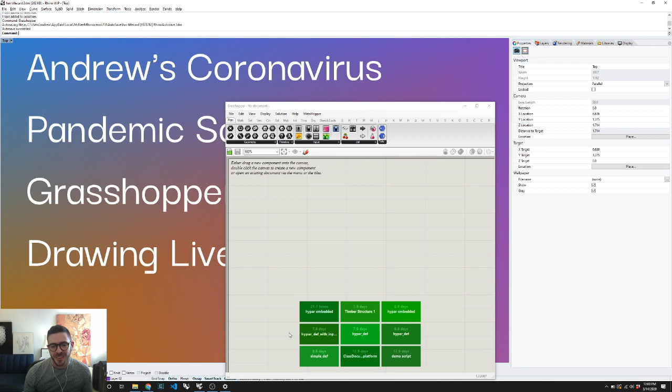Now, there's nothing quite as terrifying as the empty Grasshopper canvas. And so when it comes to starting a piece, sometimes I have an idea in mind or something that I want to play with or some concept, or more often than not, it's actually something that I saw somewhere else that I want to imitate or mimic.

So oftentimes I'll spend some time on Pinterest or on my Instagram feed and find stuff that looks cool to me and that I want to mimic or imitate.

I think that one of the things that's interesting about trying to reverse engineer something that someone else has done with Grasshopper is that inevitably, even if you manage to reproduce what you were starting with or trying to imitate perfectly, you just tweak the sliders and all of a sudden you have different work.

I think it's always an interesting exercise to extract a parametric model, something dynamic and flexible, out of someone else's work. So you're actually going to watch me noodle around Pinterest, and if we see something that excites us or that we want to mimic or imitate, we can play around with that.

It's a little bit embarrassing to show how basic my inspirational strategies are, just flipping through stuff that other people have made that looks cool and relying on the algorithm to show me. But in a way, I think there's something very real about that, and we shouldn't pretend that inspiration just comes out of nowhere.

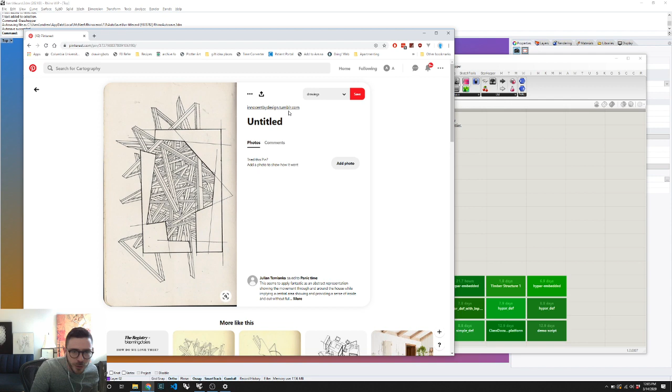He doesn't put a lot of his work online, but if you go to innocentbydesign.tumblr.com, this is his old Tumblr, which I don't think he's updated in forever, but he's super talented and you should check out his work. He's currently an interior designer at Gensler, or interior architect, and he's incredibly talented. I don't know where the archive of his work is, but always cool stuff.

So let's jump in. Let us start making some kind of random angular tubes.

And I'm going to turn off this gradient view, and I'm going to hide all this stuff. So the way that I might approach this, I usually like to start with a set of random 3D points. Populate 3D is really good for that. Here's my random set of points.

What I want to do is kind of randomly assemble these into some kind of line work that's connecting them. But I don't want to interconnect all the points. I just kind of want to set random sets together. So one way to do this would be to simply partition it into lists. So I could say partition into sets of 3 and then make polylines out of that. Let's see what we get if we do that.

So if I do that, I basically am extracting sets of 3 points at a time. This partition list will take the total list of however many points and split it into lists of 3. And then I'm going to connect each of those lists of 3 together into some kind of little polyline. I'm going to turn off preview on this guy. So that looks kind of cool. I'm getting some of that kind of angular character.

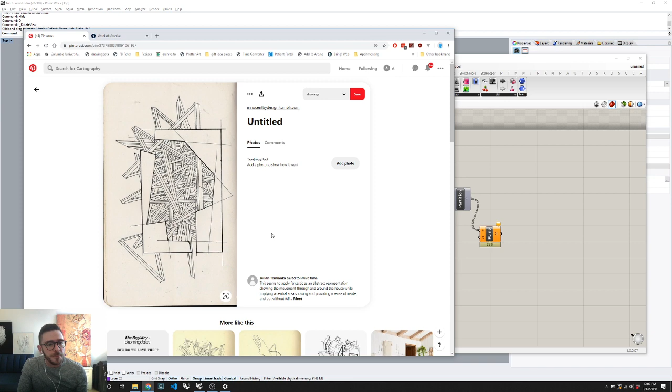And then, one of the things that the reference drawing does is that it kind of flattens these or extrudes them out into ribbons that have some 3D characteristics. So we could play with that. We could use a random vector that would extrude that along some arbitrary plane, or I can use the plane that is described by each of these.

Also, I don't like that Populate 3D uses such a flat box to start with. Let's create just an evenly sized box that I'll give some sort of arbitrary size. This shouldn't affect too much right now. So now we've got some interesting geometry.

If I wanted to get a plane through all of those points, the simplest would be just a fit plane. There are probably 100 ways to do this, but this way I get a plane from each. I can deconstruct the plane and then grab a normal, and we'll try that as the extrusion vector. I'm not totally sure how that will look, but if we took the plane normal and extruded each one of these along it, what do we get? We get something like this.

We're probably going to want that to be a little longer. I'm going to insert an amplitude, although we could multiply it as well. Let's try and plug this in. And I kind of like the idea that maybe there's some random variation in the length of this extrusion. This is looking pretty good to me because you do get a variance in the angles and the depth of stuff, but maybe it would be fun to use a random amplitude.

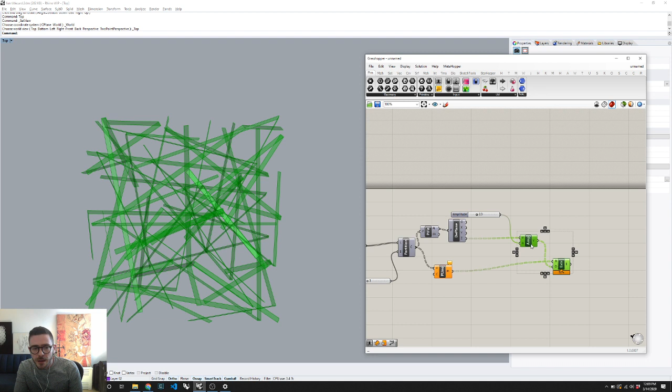I often will introduce limited degrees of randomness when I'm making work like this, and it's just kind of a fun way to go. So let's create a list of random numbers. So oftentimes when I have a data tree like this and I want to create random numbers, a trick that I often use is I'll take the list length and flatten it.

You'll often hear me say when I'm teaching Grasshopper to never flatten, like flattening is the devil, and I really believe that, but there are a few cases where it's acceptable. The reason I say that is because flattening is an inherently destructive operation in your data tree. And if we decided that we wanted to make 2 of these by supplying 2 different boxes and doing something upstream, if we flattened, now the logic is all broken. But in this case, it doesn't particularly matter.

And what I'm going to do after I flatten is unflatten. So this is a pattern I like to use. I'm going to say, okay, how many of these things are there? And I could have used any one of these lists because they all have the same list length. And I'm going to create n random numbers, and then I'm going to use unflatten in order to basically take that geometry back to its source tree.

And maybe I'll use this little fun guy so that this is a nice and clean little routine. So now I have a matching set of random values. And actually, you know what? I was wrong.

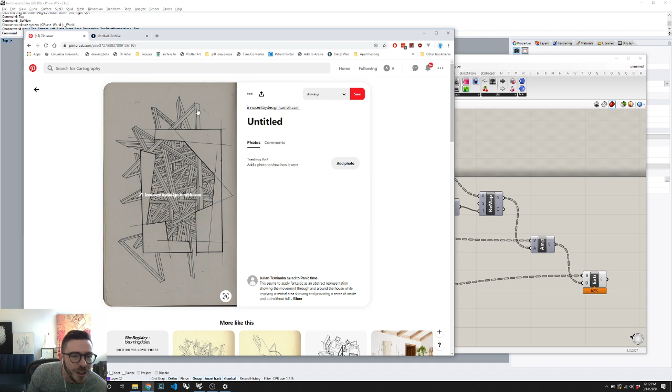And then, in order to also introduce the kind of midline, because if we look at the reference drawing I'm copying, there's this central line that he's got that is parallel to the edge and not quite centered. And in fact, in some cases, it looks like there's 2, and in some cases there's 1, and in some cases they don't even run perfectly parallel. But for now, how do we want to do this? Let's let it be, I'm having fun with this, a random number of these central lines that follow along this guy.

Also, something I often do, I have my shaded viewport set with a default background color of white, and I like to view stuff as close to the way it's going to look as a drawing right away, so that I get a sense for the aesthetic characteristic I'm getting. And in particular, I like to view things as opaque so that I get all of the benefits of occlusion and stuff. So I'm just going to do a custom preview for now. Let's just go like this.

This is a little MetaHopper trick. If you have MetaHopper installed, you can type COL equals and then the name of a color, and it'll pre-populate a swatch. So you can do col equals red and get a swatch pre-populated with red. So I'm going to use that. I'm going to leave the fact that it's shaded for now. We could also, if we wanted it to be totally flat shaded, render it as a mesh and use mesh colors, but let's just leave it as this for now.

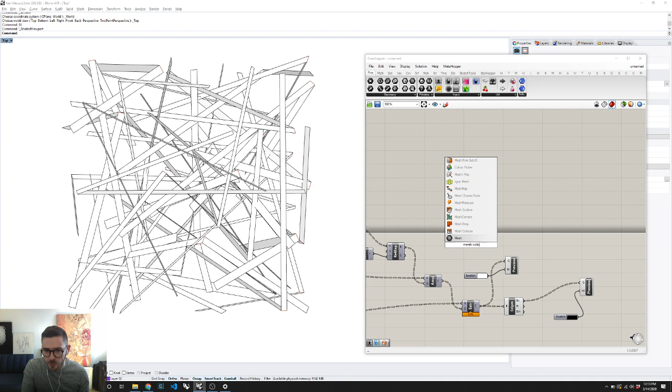And then the other thing we'll do is we'll extract the brep edges, and we're going to custom preview those. Yeah, see, this is already looking better. We'll do a custom preview with COL equals black. And yeah, that looks pretty cool. What I was saying before, if I really wanted, I could do mesh colors instead of custom preview in this particular case. Actually, let's just do that and turn that off. And then I don't even get the shading at all.

And just for those who don't know my work as much, especially over the last, really maybe almost a year and a half or 2 years, I've been mostly producing my drawings with an AxiDraw, which, hold on one second, maybe I can actually show you my setup over here. It's probably a little hard to see, but can I make this a little bigger? Hold on. I'm new to all this live streaming tech, so in any case, this is my AxiDraw. It's a little CNC machine that holds a pen, and then I basically mount some paper, and I can drive it

using, I use Inkscape, which has built-in tools for driving the AxiDraw. There's an AxiDraw plugin for Inkscape, but you can drive it any number of ways. At one point, I even tried to write a Grasshopper plugin that would drive it, but it wound up being more trouble than it was worth. So in any case, the reason I show you that is just to emphasize that the reason I like to visualize everything as close as possible to pure black line work on white is because that's actually how it's going to look at the end.

Although, you know, sometimes I'll play around with shading too and then figure out some mechanism to translate that shading into line work at some later point. So that's looking pretty good.

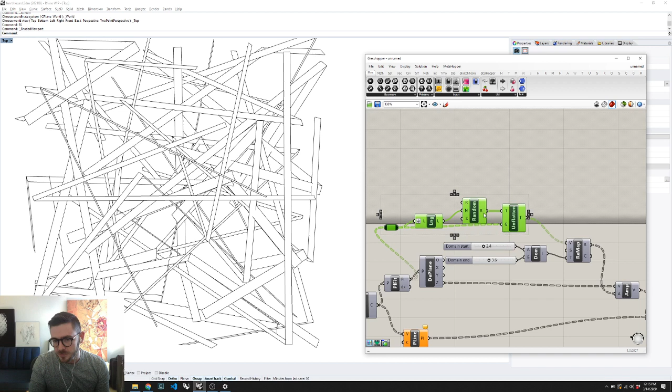So let's put this here. So I'm getting the list length, and I'm getting now a new list of random numbers. I should have exposed that seed. So I will just put a seed input there. And that way now I can get different random numbers. Because one of the things that happens if you start using random over and over again is that if you use the same random seed for all of the randoms that you generate, you get all kinds of weird things.

In fact, actually, hold on. This is a total diversion, but we're having fun. So I'm going to show you something weird about random in Grasshopper and the random generator that Grasshopper uses, which is, I believe, just system random. So imagine we wanted to create some random 3D points. Don't worry, I'll come back to the original definition.

If you grab random, and let's create 100 values, and let's give them 3 different seeds. So let's just do a series with a count of 3, and actually, I don't think we need to graft it because it'll put these as branches automatically. And then I'll just say bang to get those 3 branches, right click, match outputs, and then I'm going to construct some XYZ points.

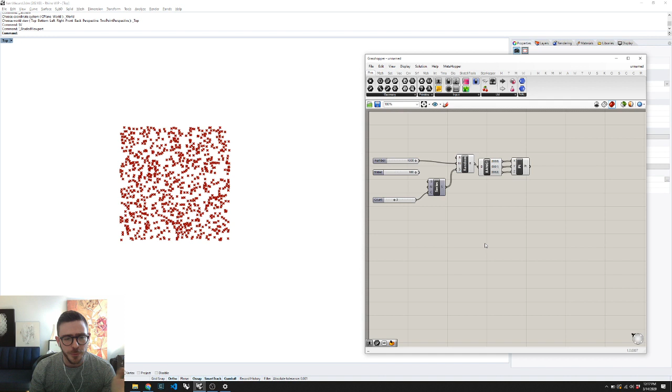So in theory, I hope I'll be able to demonstrate this because it's super weird and it's driven me crazy forever. Let's do this with closer to 1,000 points. So I've got 3 different seeds. Looks like I've got a random set of points, right? What you'll see, yes, oh perfect, it did it. If you rotate around, these are not as random as they look, even though I'm providing different seeds. And this phenomenon will occur regardless of how you structure your seeds or whatever else.

There's something about the algorithm that generates these random numbers that has some predictability, and probably someone on the video can explain a little more why this is happening. But in theory, if I'm supplying 3 different seeds and getting 3 different sets of random numbers, I would expect them to be evenly distributed, and yet somehow it creates these funny alignments between the random, which drive me absolutely insane.

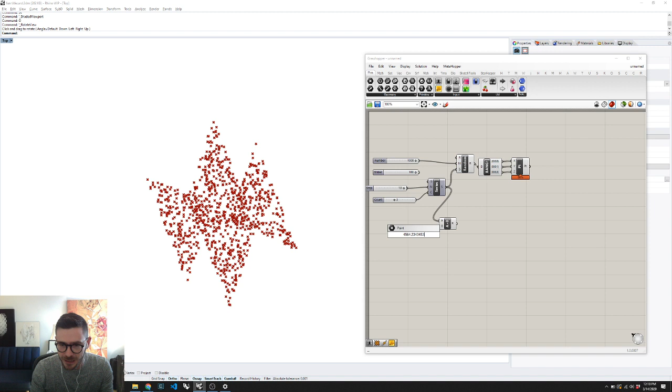If someone knows how to fix this, but honestly, as far as I know, it really doesn't matter what you do. I've tried multiplying by arbitrary decimals and stuff, and nothing that I do to the seed can prevent this from happening in some way, shape, or form. So actually, that seems to have done it, but I suspect that under other circumstances, this will demonstrate those same alignments. It's just maybe less legible in this particular fashion, because sometimes it works, and there are other kinds of these alignments that I've perceived in the past.

I do not understand why this happens. It drives me totally insane. But it's just something to keep in mind when, as we go back here, you're thinking about having multiple seeds for stuff. Oftentimes, in what's really more of a superstition than any fundamental understanding of what the fuck is going on here, pardon my French, I'll just put a super random number with some random decimals in it. Oh, that didn't work very well, did it?

Let's try 45 point. I know that it ultimately rounds it to an integer anyway, so the decimals are probably, again, totally meaningless. But I want to avoid these moments where there's some fundamental correlation between the random values in one property and the random values in another. Okay, that's our crazy aside.

So I've got a list of random numbers. I'm going to want to remap these, and remember that the value that I'm generating is the number of stripes, the number of internal lines on each one of these extrusion objects. And I think what I'm going to do is set that to be somewhere between 0 and maybe 3 at the max.

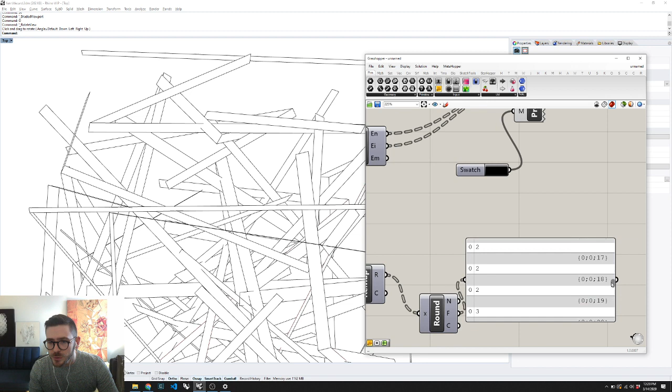So let's just construct a domain so we can play with it between 0 and 3. Actually, sometimes I'll go one larger than I want and then just use the floor once we do the random, because this is going to give me decimal values, but if I round it using the floor, we'll get a list of these values. So sometimes we're going to get 0, sometimes 2, sometimes 3. And that's going to be how many stripes to make.

So now, how are we going to generate the location of those stripes? My plan is to use the fact that these extrusions each create UV complete surfaces and then grab isocurves along them in order to get these edges that are going to be sort of parallel to the sides. So let's just set that up first, and then we'll bridge the gap.

So I'm going to explode the B-rep, and that's going to give me the individual surfaces, and then I'm going to use isocurve on those surfaces. For now, let's just use a single value. What I always do when I'm grabbing an isocurve, because I can never remember which side is going to be the U and which the V, I just supply a point that's at the same coordinate for U and for V, and I plug that in.

Let's reparameterize just so we know where we're at. And then I inevitably attach a domain to figure out, okay, it was the V curve and not the U curve. So now I can grab that, I can turn this off. Now these have the middle stripe, which looks pretty cool. But I would like to generate random middle stripes, and sometimes none at all. So let's take this, which is going to be the count of random stripes.

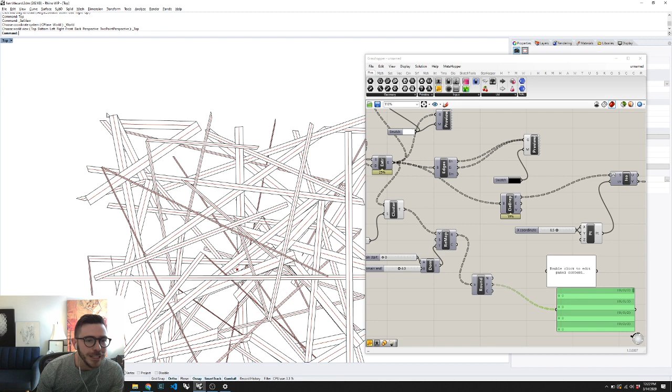Also important to note, as we look at the data tree, because I've exploded this list of B-reps, which was a grafted list with 34 branches, now I've got 34 branches, which may have 2 items. So I don't want the stripe to be in one place on one face and a different place once it wraps the corner. I want it to be continuous, so I want to supply the same sampling point for each list of surfaces. And I believe I'm in good shape because I'm generating one value per original B-rep.

The other thing I'm going to do is save this, because I always run into trouble when I get really far down in something and I've never saved it, so I don't get the benefit of autosave. So I always make sure I save in case I do something really stupid, or accidentally multiply 10,000 numbers by 10,000 other numbers in some cross product scenario, and everything just explodes.

Okay, so now these are generating our counts. What I want now is, again, some random numbers, because I'm going to want random numbers from 0 to 1, and this is going to define how many of those random numbers I get. So we are going to, again, use a random component. This is going to tell me how many random numbers to get.

And I believe if you supply a 0, I'm going to get an empty list. Yes, that's exactly what I expected and what I want. So some of these just won't have internal stripes at all. And so this is giving me the right number of these. Now, because these all have the same seed, we're in trouble.

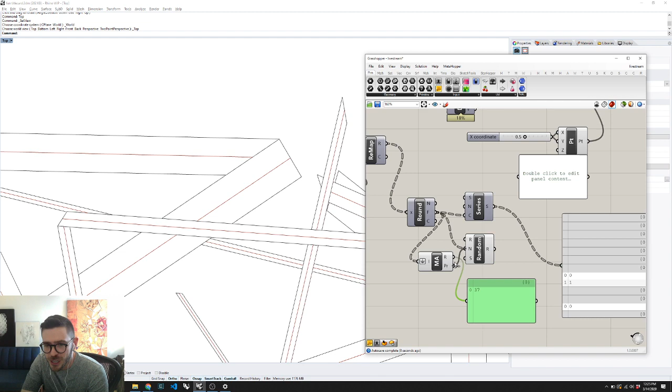If I take the mass addition, the sort of flattened mass addition or sum of all of these values, this is going to tell me how many random numbers I need in total. 37, which makes sense because there are a lot of zeros and maybe some ones and some twos. Now I'm going to generate a flat list of 37 numbers, which are all going to be different from each other. If I am correct, this series with structured values also has 37 values.

And so now I can use unflatten to basically coerce this set of random values back to the structure of the random values that I wanted in the first place. I also could have kept the random I had here. All this is doing is providing a shape for the data, but conceptually it feels weird to have a random set of numbers where I don't even care about the values. So now this should actually match our data tree.

And similarly, if we plug this in, for those who don't know, one of my favorite Grasshopper keyboard shortcuts is holding down Control-Shift in order to drag an entire bundle of wires. And now let's see what we got. It seems maybe like it's working. I think we've got a lot of ones. I'd be curious to find one where we're getting 2 or 3 because I don't actually see that. And I'm not 100% sure everything I did is working.

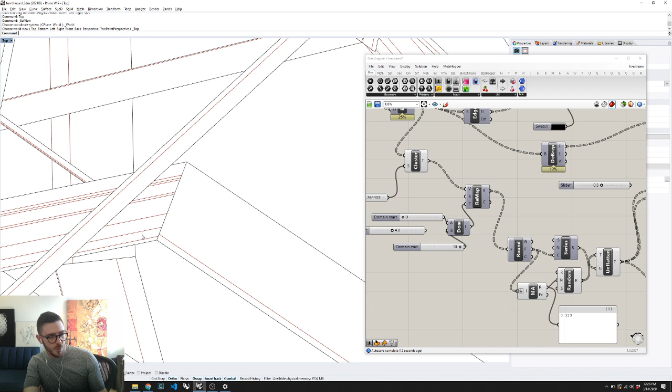So just to make sure that things are working, I'll set the max here to be more like 10. So we get a few more ribbons with a few more stripes. Now it appears to be working. I'm getting some variation in the number of internal lines that run parallel. Now I can also see that something else is wrong here, because remember how I said for my ribbons, I wanted them to wrap. So this is not quite working. And what I suspect is happening, yes, of course.

What is happening is we're running into everybody's favorite longest list matching problem, which is that I'm providing this list of points, one list per ribbon. And then I've got these, which are a list which have multiple surfaces per ribbon. So this is a very common data structure issue, and you have to move shit around. You have to basically restructure your data such that we have this entire list for each of these.

And there are a bunch of different ways to do this, but the way that I like to do it is with some MetaHopper components that I've built for doing some tree and list manipulation. So I'm going to wrap this list. And what does it mean to wrap a list? I'm going to use wrap list and levels. Wrap list is very similar to group, but it takes a list of values like these and turns that list into a singular object. So an object with no items, an object with 2 items.

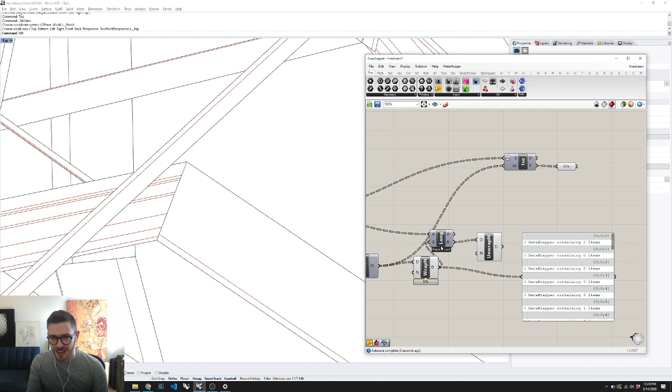So now with those unwrapped values, we've got a sort of perfect corner turning. And so every ribbon has a consistent pattern along that ribbon, which is cool. It adds to the 3-dimensionality of this, and I kind of like it.

I'm also kind of liking starting to deviate from our reference sketch and introduce more parallel lines. I think this is looking kind of cool. I also like that there's some contrast going on between the inner lines and the outer lines.

Just to keep things clean, I think what I'm going to do is custom preview line weights. Plug these in, and then let's make some fat lines for the outside. And in fact, let's only do that for the naked edges. And then, ooh, that's kind of cool too if we skip the fold line.

I'm not sure what the original was, but it's nice when you see it there. So maybe I'll bring it back in, but with a lower line weight.

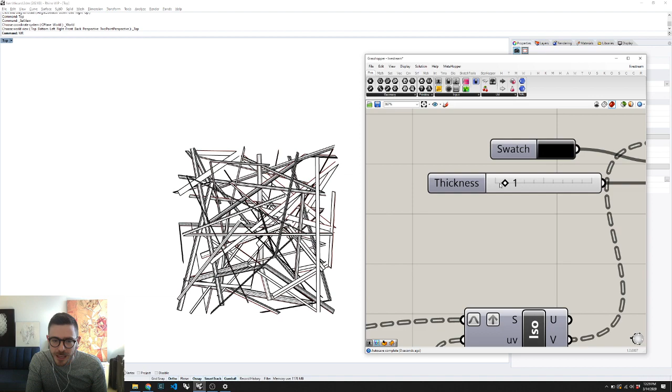This is a component from Human, preview with line weights, that allows you to set the pixel width of stuff in your Rhino viewport. So let's use thin lines for the insides, and let's also include those inner edges in this lighter line weight. That's looking pretty cool.

I've definitely got some other stuff previewing that I don't particularly want. Oh, I did want that. So that's looking pretty good. This looks cool in and of itself. It's also totally 3D, so I could decide it's much more interesting to view it from this angle or that angle or whatever.

The other thing is that we can now start to flex the box that we've got. If I make it bigger, it's probably not going to do a whole lot—yeah, that's doing something, not a whole lot. I'd expect Populate 3D is going to use very similar logic independent of the scale of the box.

But we could separate these out so that we're not necessarily working with a perfect cube. Let's play around a little bit.

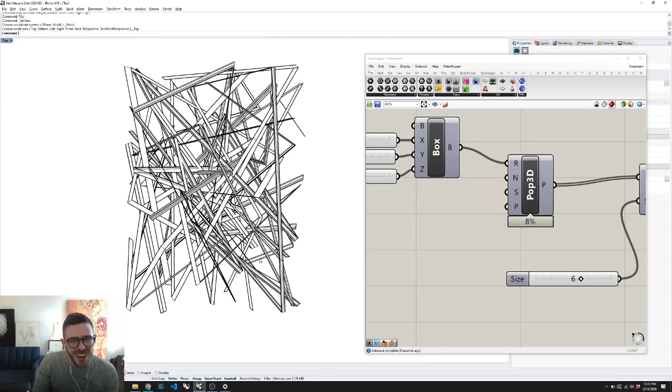Yeah, it looks cool. We could increase the number. Right now we have 100, which gets divided by 3 because we're partitioning by 3. We could also partition by something else and get more complex zigzags. Each one of these ribbons actually spans 6 points. But I kind of liked where it was at 3—2 would be really boring, but 3 looks pretty cool.

So, okay, here's some stuff. Now what do we do?

I kind of liked in the original the way there was just this random figure which seems to have been cut out of a rectangle with some voids and some construction lines. And I kind of like that it's obscuring everything beyond.

So let's see what we can do about that. It definitely won't look exactly like this, but I think we can do some similar things. So what are we going to do? In order to create that figure, I'm going to create a rectangle, and I could do this randomly.

For now, I think I'm just going to literally draw the rectangle, but later on we can maybe couple this so we can generate hundreds of random variations of this drawing if we feel like it. But for now I'm just going to make one. So let's specify one rectangle, kind of like that. I don't know.

And what we're going to do, it's also probably in the ground plane, so we'll move it up in the Z by a lot. I often render my drawings as a strict top view, and then I use 3-dimensional layering to control how they flatten on top of each other. At some point we're going to do a Make 2D with this drawing, so let's just bring it up by 50—that ought to be sufficient.

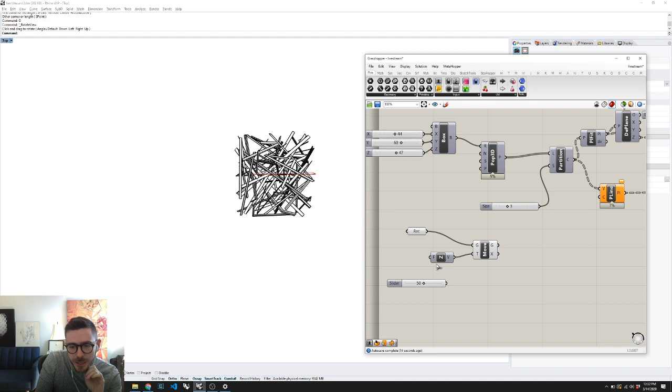That looks good. And then what I want to do is create some shape out of this rectangle that carves it away. If we look at this, there's kind of these lines, some of which extend a little beyond. So I think this strategy of starting with a limited set of random lines that lie across this surface would be a cool strategy.

So I'm going to make a surface out of this guy. I'm going to do Populate 2D this time.

Let's do partition list by 2. This is going to be way too many lines, but we're going to reduce it later. So let's do a polyline to make those into this repeating pattern, generating random lines by generating random points and then partitioning it in order to construct these.

So just so I can see what I'm doing, I'm going to turn off preview for this guy. So now I have a list of random lines that lie on that surface.

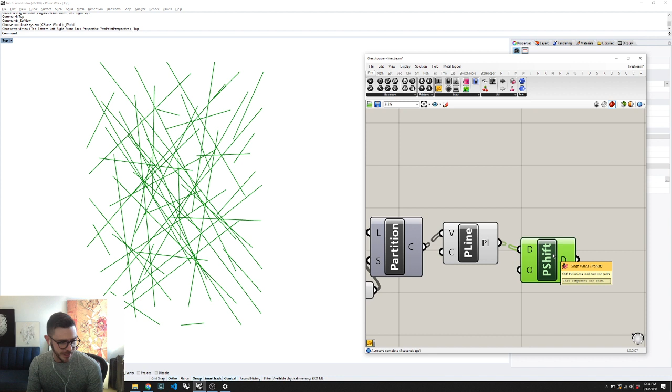And remember before I was saying never flatten anything. In this case, I do care about that, because what if I want to generate 2 of these? Whenever you think you should flatten, you should really p-shift or shift paths. This is a non-destructive way to basically pop one layer back out of your data tree.

So these are looking cool. I might also extend them a little bit. Also, the ordering of this really doesn't matter. I could have done this before or after the P shift. I'm just kind of improvising here.

Extend them a little bit, and then I'm going to do a random reduce in order to get back, let's say, well how many do we have? We've got 50. And I really only want, let's say, 10 lines. So I'm going to subtract 10, and we will reduce by — I think this is the amount that you reduce by, right? Yeah, number of items to remove.

So now we should have, if I turn off preview, 10 random lines. That might not be enough, so let's try 15. You'll see that I don't even edit sliders ever — if I need a new slider, I just type a number in the search keyword and replace the old one.

Then we've got our rectangle, which is up here somewhere. I might, just to avoid things getting too tangled, shift all this down here. Let's extend a little more — I just want there to be the possibility of this thing splitting.

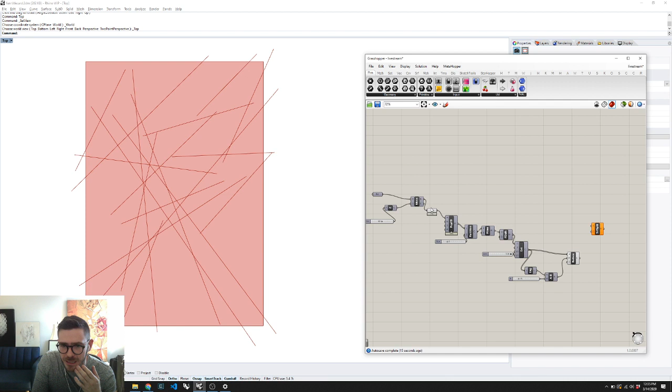Because let's see what happens if I take these lines and use surface split — this was my idea, to basically take these random lines and split them. Component that I really love. Okay, so yeah, that actually looks pretty cool, and I think this is along the lines of what I wanted.

Pardon me, that's a cough, by the way, for those of you worried about me — that's a cough I've had for a very long time, and I feel fine, I have had no fever, so please don't be concerned.

When I do a surface split operation, I often want to see the individual things and just make sure the split happened correctly. It used to be that split would fail a whole lot more and you really had to be careful about this. It's gotten a lot better, but I'm still superstitious.

So I use a component from Wombat called Identity Preview whenever I just want to make sure items are distinct from each other, because it just takes your objects and colors them with a random color, so you can see this object is distinct from that one. It also looks kind of cool in and of itself, but that's a nice debug check to make sure the split actually worked.

And then what I want to do is randomly remove some of the shards from this thing. I think, to keep the spirit of this, I want to prioritize removing the shards that are closest to the middle.

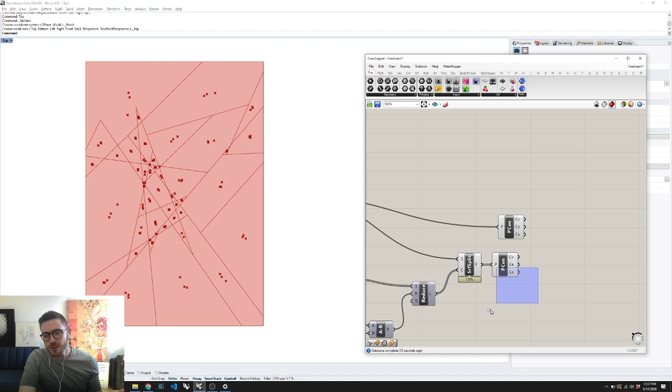So let's take this surface, let's take its center, which we could do any number of ways — let's take the center of all of these. You'll notice I'm pretty loose about data typing, just casting shit willy-nilly because Grasshopper supports it so well. So even though this is a surface, I'm going to treat it as a polyline for finding its vertex center. I could have used evaluate surf or area centroid or whatever — that would have been fine too.

So let us take the distance from the center of the rectangle to the center of all of the surfaces. And I think what I'm going to do is sort the list of these, sorting them by their distance. Then let's just look at what a sublist might look like — how many of these do I have? We're looking at 51, so let's try 20.

So these are the 20 that are closest to the middle. And actually what I want is to reverse this list so that I wind up with the ones that are outermost. Let's try that, yeah, that's kind of what I'm hoping for. That looks cool, let's go with that.

So now I'm going to take all of these, turn them off. Now I've got my shape that I'm going to want to be rendered in front of all of my line work over here.

I'm missing some stuff. Oh, I'm missing my mesh. Where'd you go? Oh no, mesh is on. Preview, oh this preview line weight. Okay, and then this will also just mesh colors in order to represent it as white. Color equals white, plug that in.

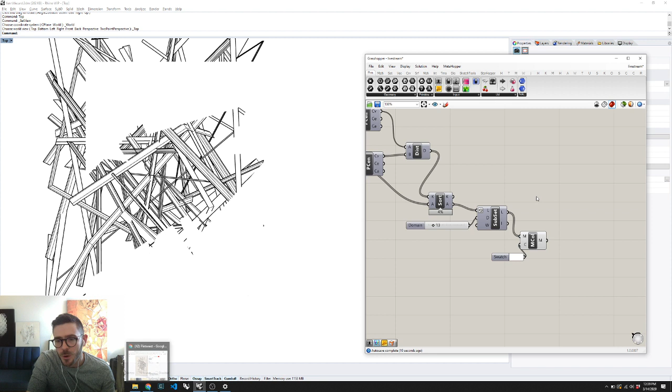And then what I want to do is bring back in those edges. And so what I could do, I think what I'm going to do is actually join this back into some B-reps, merge their faces. Maybe, maybe not. Yeah, let's do that, let's merge their faces. We'll see how it looks.

So basically I'm going to remove all of the internal edges that were there. But then, in order to get that kind of construction line look, I'm going to actually get the edges back out. So I'm going to use B-rep edges out of this, take the naked edges and boop, boop, boop. Should I, how did it look in here?

I think I'm just going to kind of extend them all. Let's see what happens. Whoops, extend curve, naked edges by 4. Let's try that.

Yes, custom preview line weights. We're going to do like 3 maybe, color equals black. If I could type, plug that in.

Yeah, so it's looking, I kind of like that they're sort of construction-liney, and then I might take the fragments. I think what's cool about this, it looks like the whole border of these shapes does have sort of a thickened appearance. So if I wanted to do that, I would take just the original naked edges.

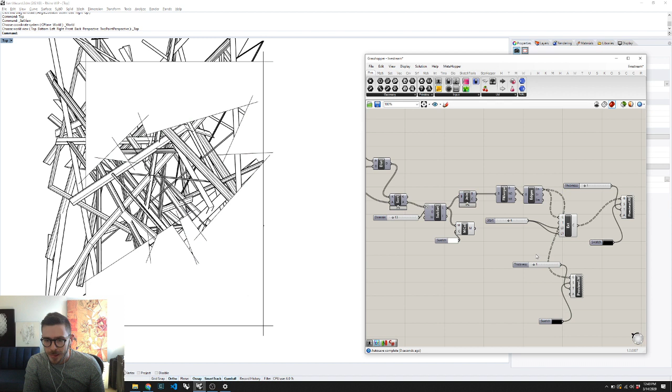Actually, I don't even need this copy. I can just take this and plug these in and make these guys a little fatter. And now we're getting somewhere.

So that looks pretty cool, I'm into that. It's still pretty derivative of what Sebastian had done, so I don't know if he would be cool with me claiming this as mine, because it's clearly a ripoff. And so oftentimes when I get to a point like this, I'm going to start trying to move away from the reference, because I don't ever want the result of something where I was deliberately imitating or mimicking to just look like a ripoff.

I am certainly guilty of producing work that looks a hell of a lot like the thing I was referring back to. But like I said before, I think what's cool about doing this with Grasshopper is that all I have to start doing is tweaking the sliders and tweaking the logic in order to get something interesting.

So what could we do here, in order to make this a little more mine and a little less his, what could we do? One thing we could do is curve the ribbons rather than have them be sharp, although I do really like how sharp they are. Let's try it, let's see how it looks. It's probably going to look like crap.

If we wanted to do that, we would just take the polylines we generated back here and fillet them. Or, well, there are a few ways to do it. Let's try it with a fillet. I love a good fillet, let me tell you. Let's try that. It's already looking bad, but let's try it. Let's see what happens, you never know.

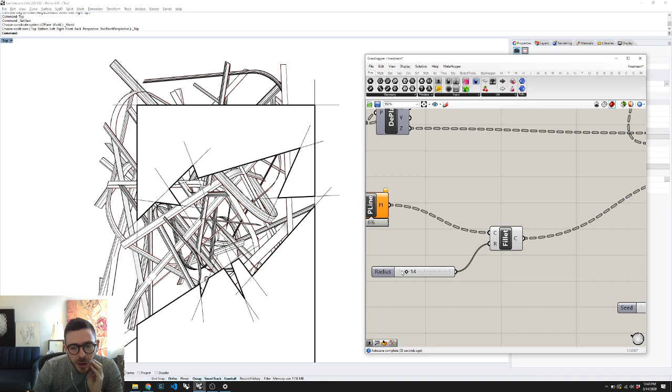We could just turn this back on, which is kind of cool, maybe. I don't know. So, we could play with that. There's something kind of cool about these ribbons. We can play with the random range and maybe let them get a little fatter. I'm probably just making this worse. Like, I really can't improve on what Sebastian had.

Let's see. What else should we do? What if I don't have this? Let's just look at where we're at. Whoops. This guy is also here. Yeah, I don't like that very much. Let's let it be angular again. What else could we do?

Let me see. One thing we could do is actually take the entire set of geometry and introduce some kind of a distortion or a transformation to it. Sometimes that's fun. So sometimes what I'll do is, if I want to keep the fact that they're angular but introduce some degree of curvature into the system, let's just try this manually first, and then we can always screw with it later.

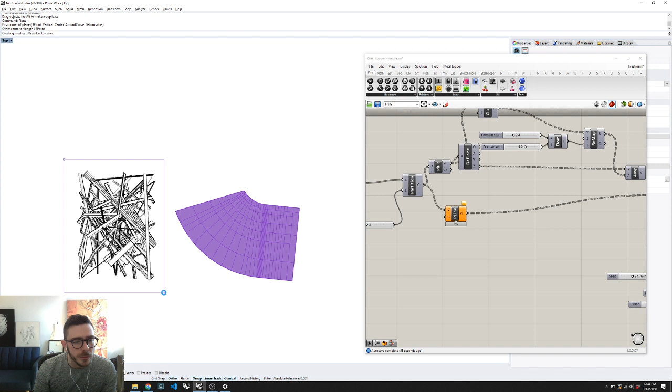I'm going to make a surface over here. And we're going to make a nice warped coordinate system. I don't know. That's ugly, but let's try it. And then we're going to do another one from here. So what if I were to take these, let's try it just on the polylines because that's nice and easy.

So if I take my reference surface over here and my target surface over here, then if I do map to surface, is it going to project everything back down? It might. Let's try it. Firstly, let's just reparameterize these both so that they have the same domain. Are they still 3D? Yeah, they are.

That's not bad. And so all I need to do now is I'll explode them, and I'll rebuild them, and then I'll rejoin them. So let's rebuild with, I don't know, 10 control points, and then let's rejoin them. Yeah, that should work. And this is another data tree point.

Whenever I am stitching something back in, I'm going to double check and make sure, okay, here's the path that I have going into this guy now. And this is now different, can I get it back to where it was? In this case, this introduced a new layer. This did not introduce a layer. This introduced a layer, so I'm going to need to p-shift by 2 to get it back to where it was.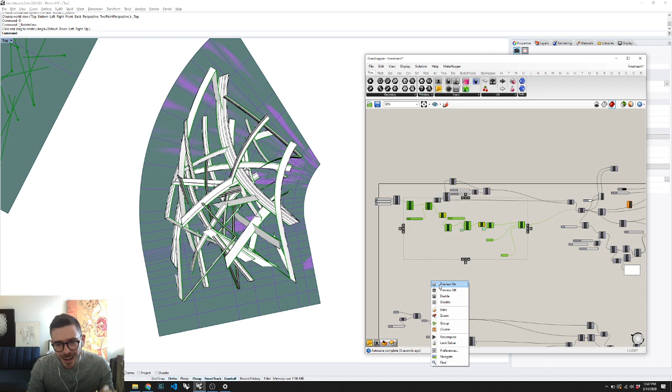So I'll plug this guy in. Let's take that. Let's plug that in. Let's see where we're at as the general drawing. That I like better than the fillet, that's for sure. There's something cool starting to happen here. I like that we're getting a little more curvature and dynamism out of this.

I kind of think maybe one way to play with this would be, rather than to just obscure it with some geometry in the front, to Boolean it out or trim out some geometry with some sort of a void, maybe. I'm not sure. Let's see. I do like where we're starting to get here, although I might tweak this guy a little bit more. There's something nice about that.

Let me just rebuild you by 5 so that I have a little more control. Ugh. Let's see. I don't know. Oh, forgot one. Yeah. I don't know that that's doing much that's interesting. Okay. Okay. Oh, I appreciate there are a lot of suggestions in here. Let's see. What should we do?

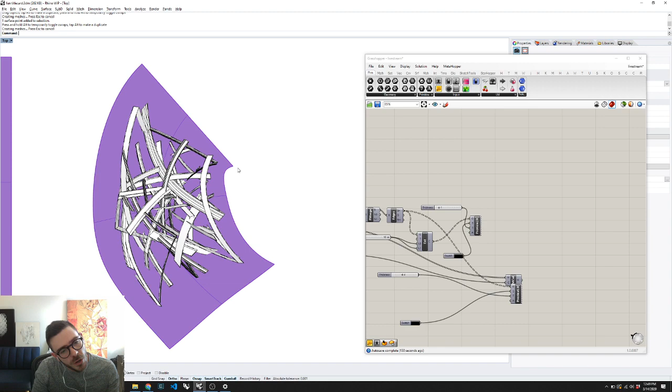I think I do want to subtract something from this. I think I want there to be a void. And so let's see what that could be. Also, this is nasty. Let's see if we can clean that up just a little. And also we're only seeing half. Yeah, some sort of a void I think would be an interesting thought.

Yeah, let's try that. So, the original rectangle that I specified over here was somewhere else. Let's try something like that. And let's see where we're at with that.

I mean, I don't know, that's kind of cool. It's still a little too Sebastian, but I feel like there's something in this. I mean, I don't know, now I kind of like it. This is the problem. I stand there looking at it and stuff. I wonder if maybe

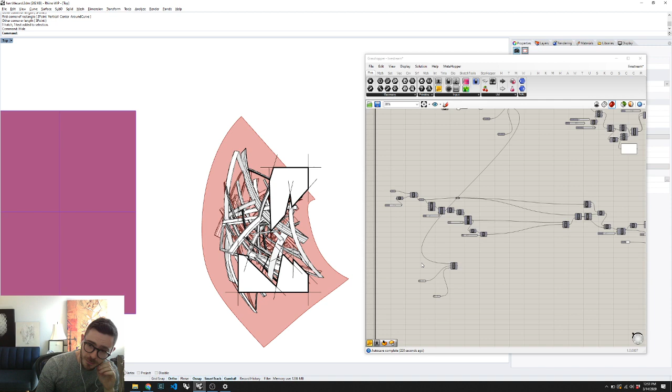I think it would be a mistake to use the same map surface, but let's just try this. I think this is going to be a mistake, because having things flow too closely along the same kind of distorted coordinate system is probably not the way to go. Oh, there's my text. Hello. But let's just try it.

So these are my surfaces. This may or may not work if I just cast them to curves and then cast them back again. We're going to want to do this in such a way that it's near the reference surface, so I'm going to have to draw it here or something. And then let's take those and try mapping those and see what we get. Also, this is another case where, because they were sort of polylines, in order to get nice results, I mean, actually we could try it as is.

Okay, we're going to do this and then this. Do a little surgery. But of course that is now going to be in the wrong place. So in fact, what we want are the undistorted ones for the purposes of the sort, but we only want to sort the distorted ones. So what do we wind up with there? Yeah, I don't like that too much.

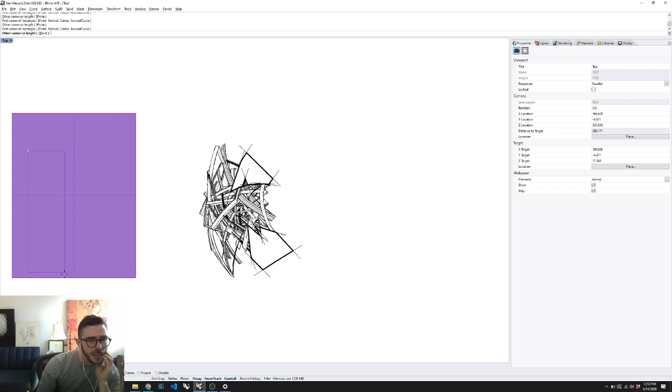Is it possible that just doing a different rectangle would be sufficient? Or maybe a pair of rectangles? To kind of take it along its flow here. Now I'm going to be really glad that I didn't flatten anywhere. So I know I can do that effortlessly, because all it's going to do is add a little more variety there. And then we're also going to want 2 different seeds probably for this. Graft. Okay, so if I have 2 different seeds, I'll get 2 different results.

See, now I feel like I might want to bring back properly circular geometry rather than this kind of arbitrary bend I did. So what if we used an arc somewhere? Let's see, how could we do this? I mean, I could just model it. Let's do that to start. Center of arc from here to here, and then we're gonna offset it through point. This is probably too extreme. Let's do it anyway.

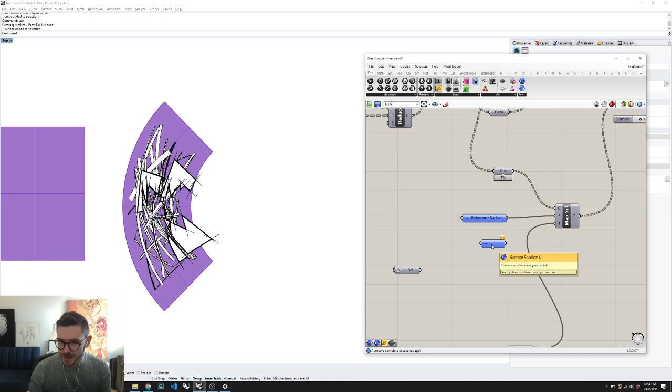Now, if I have that, I'm gonna want to refer to these. Oh, here's another little tip. If this is my reference surface, oftentimes if I have stuff jumping from one part of the definition to another, I'll use Telepathy. So I'll say send equals reference surface, and send equals target surface. And then down here, I'm going to replace these with a receiver equals reference surface. And this will automatically wire itself up to that other thing. Or I can right click and go grab it, target surface, and it will populate itself. So now I'm using the same thing in both places.

This definitely feels like too much. It's just too long in one axis, so maybe I can do a subsurface, aka an isotrim, and I'll just set domain 2D. We're gonna construct domain 2D from 4 numbers. Reparameterize, and then I'll just say 0.5. Is it in the V? Yeah, that's kind of what I wanted. So I can slide this thing along.

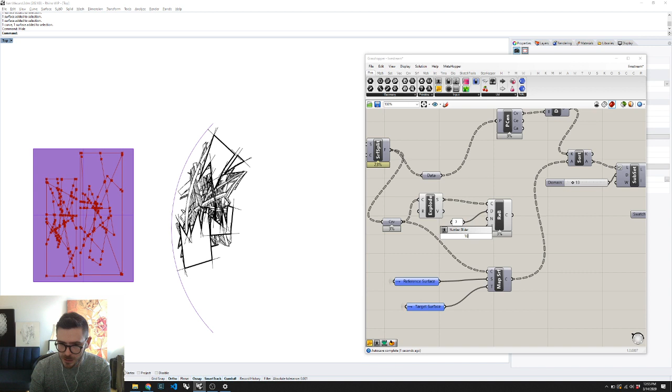And now the more that I look at this, the more I think that these really do need to curve to follow this new geometry. So let's hide this and this. In order to achieve that, it was this moment where I mapped the surface. Instead, just like I did before, I'm going to explode the curves. I'm going to rebuild them with a degree. I think it has 3 by default. No, it doesn't. We'll do 3, and we'll use 10. And then we're going to rejoin. And I'll probably have to do a path shift over 2 here to get back to the data structure I had here, which was 0, 1, 0, 0, 0.

So yeah, let's try -2. 0, 1, 0, 0, 0. Now those will curve and sort of follow the geometry. I mean, now that's looking kind of cool. I just wish there was like a little more variety here. So it might just be a matter of tweaking a few of the seeds.

Also, I need to clean up my order. We're going to need to part the Red Sea again and make it so that we don't have wires going back on themselves.

Yeah, Brian Ringley always used to yell at me for my poorly organized definitions, but especially when I'm working creatively, I gotta go at maximum speed, and I just don't have time to clean stuff up while I'm going. It's much more important to have that flow.

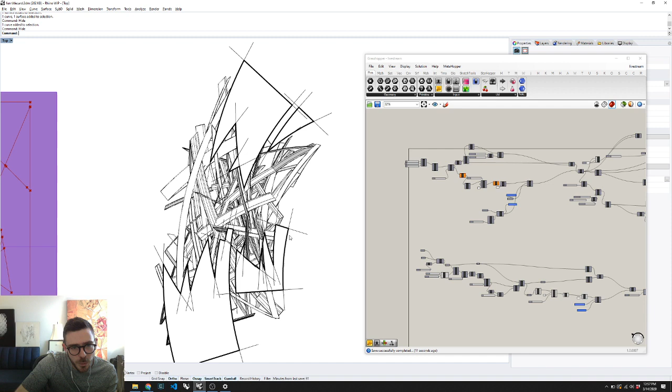Yeah, that looks all right. Let's go ahead and save this. This is looking cool. I just want, let's see. I'm not super satisfied with the figures in the front. I would like them to be a bit different. Here's where they actually are. And so we can actually see, here they are.

We could have done this whole operation. In fact, let's do that. So what I'm going to do is actually move this operation, which does the distortion, to after the subset, so I can get a preview of what it looks like pre-distortion. So I'm just going to rearrange some stuff. So that goes in there.

Now we're back. This is probably a pretty good representation. Yeah, that's what I wanted. And so now if I plug this in here instead, and let's find all of the places where this goes, and maybe I'll even unite them using the little relays, that's what they're called. Let's plug this guy in, and now, with this preview on, I can kind of visualize what's happening.

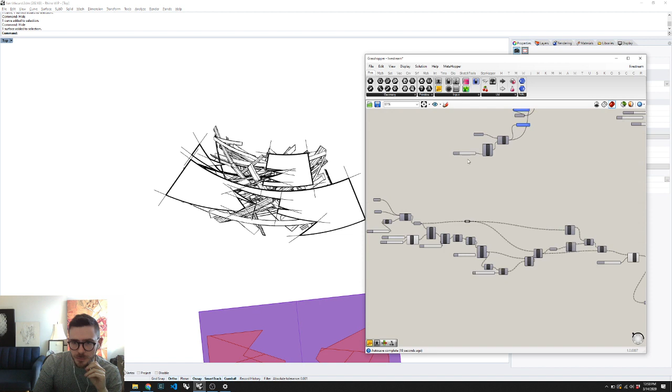And I think, is it a matter of having less removed? That's kind of interesting. This is getting somewhere, I think. I actually want to reduce the subdomain of this surface even further, because it's still a little too long. That's getting somewhere for me. I kind of like where we're at. I do kind of want it to be oriented like this. I always rotate shit arbitrarily, over and over again.

The other interesting feature that's happening here, which might be fun to play with, are the moments at which the ribbons intersect each other. So also, can I get away with less line work? What would it look like if I didn't have this? Nah, the line work's nice. By itself, it's boring. If I just have the construction lines, yeah, well, we'll see. Okay, so let's leave it all in. I'm feeling good about it.

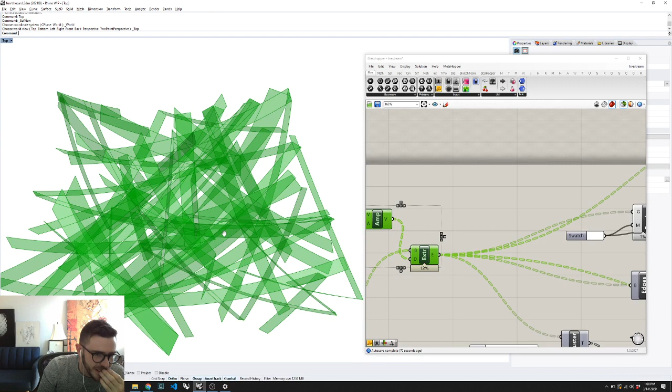However, I do think it might be fun to play with the moments of intersection, stuff like this. So if I have all of my surfaces over here, I want to intersect them all with each other. Yeah, this could be cool. So what are we going to do? We've got 33 surfaces. I'm gonna give myself a little gap, although I don't know that I'm necessarily going to replace these. But we'll see. I think what I want to do is take these, and oh no, they're B-reps, aren't they?

What I want to do is intersect each one with each other one. So I am going to p-shift this. So now I have a flat list, and I'm going to use cross-reference in strict upper triangle mode, I believe. If you're not familiar with this, it's useful to understand. Let's do a character sequence just to visualize it. So we'll do character sequence and we'll use cross-reference.

So what does cross-reference do, first of all? Cross-reference is a way of kind of multiplying one list by another. So let's just do this with 5 values. It'll be easier to see. So this sequence is just A, B, C, D, E.

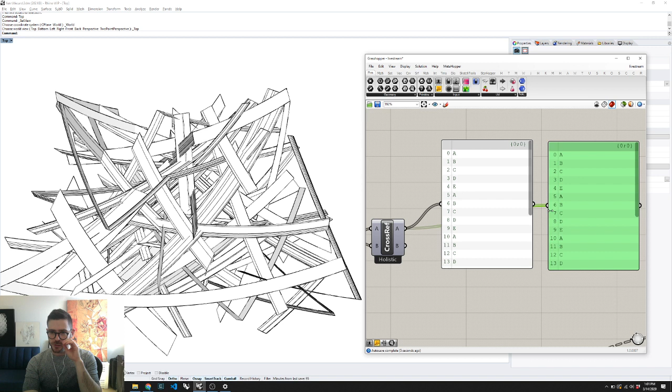Cross-reference will generate A, B, C, D, E, A, B, C, D, E, A, B, C, D, E in the A, and then it'll generate A, A, A, A, A, B, B, B, B, B, C, C, C, C, C, so that you basically get every possible combination of the two. So if I were to join these two together, I would get every possible 2-letter sequence you could make out of A's and B's. Now, if I switch to strict upper, well, here, let's cycle through the options.

Diagonal will just be, actually, I don't even know what that does, honestly, because I never use it. It describes it: do not create those combinations where all items have the same index. I see. So this is everything minus the diagonal. So you won't get an AA or a BB, but you will get a BA, and you will get an AB.

Upper triangle says, and if you visualize this as a matrix, where basically your list is along the x-axis and along the y-axis, if you imagine every possible combination along that grid, and visualize just the upper triangle, you'll see what you get, which is every pairing of the two, regardless of their order. Because when I do holistic, I'm gonna get an AC, and I'm also gonna get a CA.

If we do upper triangle, then we'll get every possible combination where order doesn't matter. So if I have a DE, I will not have an ED. And upper strict removes the ones where they have the same index. So AA is not going to be here, or BB. But this tells me that for these 5 options, there are basically 10 ways to combine them as a pair, irrespective of the order. So why do I care about that?

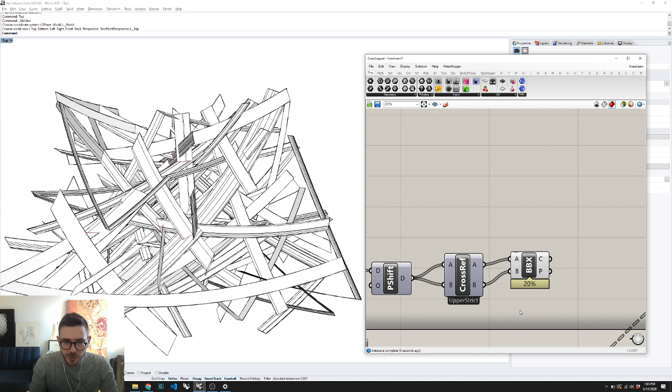When I'm doing an operation like this, where I basically want to have every B-rep intersected with every other B-rep, I may end up doing this and then wind up, for data reasons, going back to something a little bit more brute force, but I just want to demonstrate it. If I now say intersect every B-rep with every other B-rep, there are 33 of them, and this only has to execute 528 times, but it's going to find every intersection moment between any two ribbons. So this is pretty useful.

Now what I might want to do, I'm still not totally clear what my hope is with this, is I might want to introduce a reveal, like maybe one of them pulls away where it intersects another one. I feel like that could be cool. Let's see what happens. It might wind up being a little difficult, but let's try that, and then I might call this one done depending on where we land.

So now I've got a bunch of these surfaces. What am I doing with them? I'm getting their edges, I'm converting them to mesh, I'm deconstructing them as individual surfaces, which should be fine, and then I'm getting isocurves. The reason I'm doing this check is I just want to make sure that if I were to introduce a trim to these currently untrimmed surfaces, I wouldn't break anything.

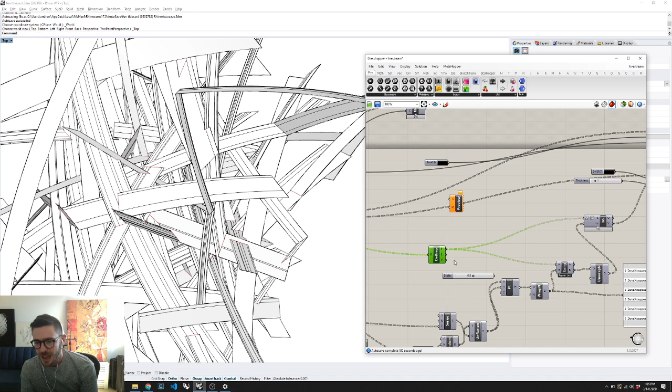And in fact, I think I'm safe, because if you have a surface that has some hole in it, we'll just do like this, I believe if you take that surface and do isocurves from it at some coordinate, it is gonna respect the holes. I don't think it always did, but I just did a tutorial the other day where I found out that it did. So is that true? Let's just see. Oh yeah, it's actually trimming it against the trims, which is great. So I believe we are safe if we introduce a trim.

So how are we going to introduce a trim? It's always hard to Boolean an object in 3D that's not a closed volume. So let's see what we can do. One thing we could do is, I kind of like this idea. Let's try this. This is probably not the best way to go, but I'm going to do it anyway. So let's take these surfaces and in fact, let's...

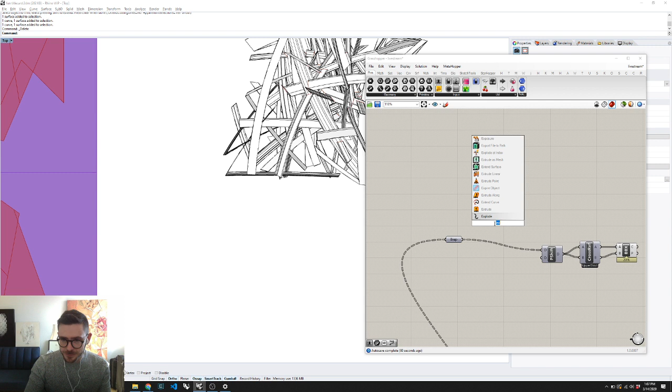I think I have to get rid of this because I think I need to know which surface each edge belongs to, but that's okay. So I'm going to explode the B-reps with deconstruct B-rep. Now I've got all my whole surfaces. I'm going to get their dimensions. This is going to look crazy for a moment.

I'm going to get their dimensions, and I'm going to construct some plane surfaces, actually, which have the same dimensions as these. Why on earth would we want to do that? Because what I'm going to do is I'm going to take these surfaces now, and unfortunately I think I can't use my super efficient logic here.

I think what I have to do is I am going to actually intersect, well, actually, no, let's use these because we've already gone to the work of calculating where these intersection lines are, and basically I just want to attach these intersections back to the surfaces that they came from in a data structure. There are lots of ways to do this, but I think the easiest way, the sort of cheating way, is going to be just to use a distance test.

So I'm going to find the middle of each of these intersection curves. I'm going to do a surface closest point on my surfaces, and I'm going to find these. I think they can be flattened, or at least I'm going to adhere to my own rules and p-shift them just for the hell of it. So now I've got a flat list of all the points which are in all of these intersection edges.

I'm going to test each one, or actually we probably need to graft this. If the distance from each of these surfaces to each of these lines is smaller than 0.01, some small threshold, you never want to check equal to 0. You always want to check smaller than some value, because floating point math will often introduce very small numerical errors. It's always a good idea to have a tolerance.

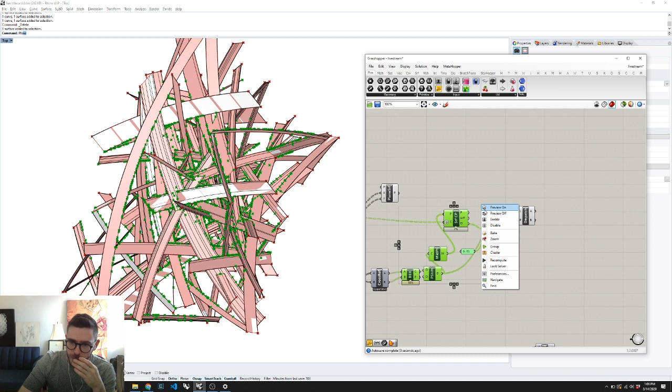So if that value is smaller than this one, we're going to dispatch out the edges. So I've got 65 edges, which I'm checking against all of my surfaces. There's probably a smarter data structure way to do this, but when in doubt, use a distance logic. So just to check, I now have one list for each of my grafted surfaces, each of which has 65 values, which are the 65 intersections that we found.

So now I'm going to wind up with edges that are organized by the surfaces they belong to. This is not dissimilar from a technique like taking a waffle grid and then unfolding it out flat. You'll see what I mean in a second. So I've got all these curves, they lie on all of these surfaces, and I've generated new unrolled versions of these surfaces, which just for shits and giggles we can view on a grid using arrange in grid from Wombat. This is just to visualize, so I'm going to flatten it. But you can see basically I've created this set of surfaces, which are sort of like unrolled versions of each of the ribbons.

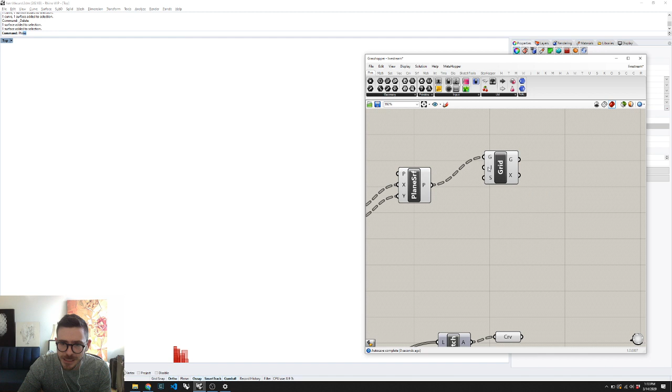And what I'm going to do is take, and actually, you know what? If I let this, it's gonna do that. So let's just unflatten post. Just for clarity's sake, I don't think spreading this out is actually necessary, but let's just double check, because there used to be a bug, which is probably my own fault, that arranging stuff in grid would actually shift its order. Is the order the same? No, the order is the same.

Okay, cool. So now I've got my unrolled surfaces and I've got my surfaces in space, and I'm going to do another remap curve, or map curve to surface. Whoops, not that guy. Map to surface, where these are my source surfaces, these are my curves. This is a really silly way to do this, by the way. So if I've done my job right, it's going to put, and let's also, always a good idea to reparameterize whenever you're doing anything involving a surface domain. Maybe not necessary in this particular case, but it doesn't seem to have changed anything.

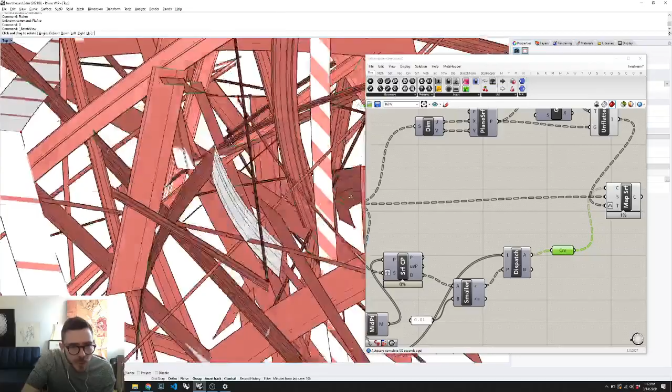Now why are they all showing up on the edges? I wouldn't expect that they would. Are there a lot that are falling directly along the edges? It doesn't look like it. So something I'm doing is wrong here. What I want to see is a bunch of diagonal slashes showing up along these guys. And I see some, but there are also a ton that are right at the edges, and that doesn't seem right to me.

Wonder why that is. Let's be a paranoid reparameterizer and check data structures. Yes, these need to be grafted, both of them. Just to avoid any issues, I'm going to lock the solver before doing my double graft. There we go, that's what I wanted.

I have coffee as well. Mine has whiskey in it. I highly recommend that on a day like today.

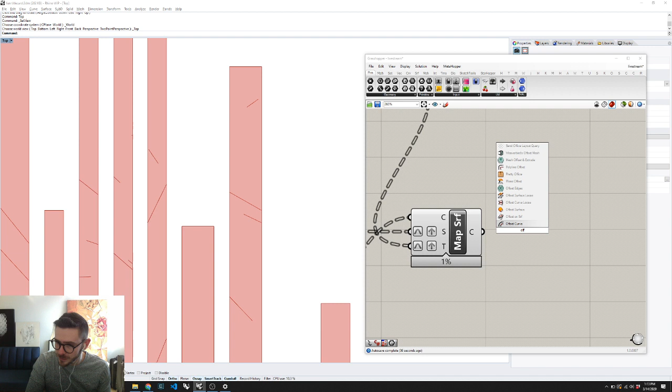So what have we done? We took all of these intersections out in space, and we unrolled all of the ribbons and mapped them back down to the ground. Then I'm going to do an offset polyline using Clipper to create some nice thickened versions of these. Might be too much... no, that looks good, that's a nice size for my little reveals where these intersections happen. And then, if all goes according to plan, I should be able to...

Let us do this. We're gonna do a... how are we gonna do this? There are lots of ways, let's do a region difference for now, which is going to take my unrolled surfaces and my little slits that I want to cut out of them.

Let's just check data structures. This is probably going to have to be grafted. That should work. It's going to cut those holes out. Ah yeah, that looks nice. We like this, this is exactly what we were going for.

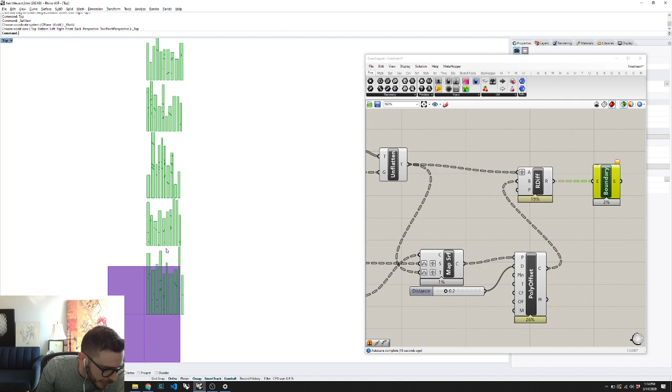So now, the next trick... you know the other thing we could do? Nah, I think this is the way to go. I think what we want to do, if we're lucky, we could maybe copy the trims.

Let's test that over here. This is a weird component, copy trim, which allows you to take the trim curves from one surface and map them to another. So if this is the target surface, again I'm going to graft. And then let's just check, now we're in funky data tree scenarios - 67 branches, and then let's graft and check. 67 branches, yeah okay cool, I buy it.

We could still be in dangerous territory here. Yeah, so almost, but that's promising actually. It's not quite right, but ultimately what I want to do is basically copy these trims. I think in any scenario where there were multiple surfaces generated, that's what happened - any scenario where there are multiples, where we got a full through cut, we're getting this funky situation, which makes sense. This is not going to work exactly.

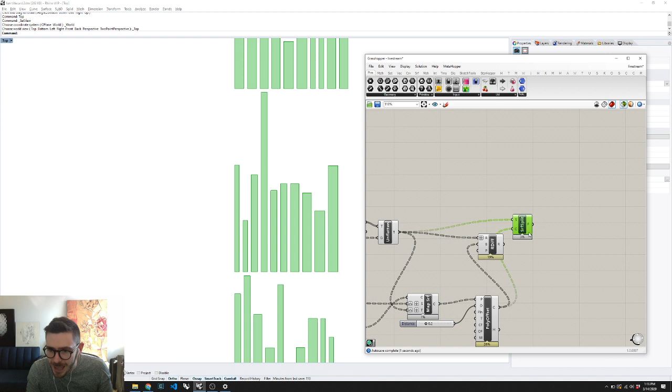So instead, this is what we're going to do. Similar technique, but instead of relying on boundary surface, we're going to use split surface again, where we're going to take all of our unrolled surfaces and all of our little cuts. Oh, this probably needs to be grafted - whoops, grafted, not flattened. And now we're going to take - did we get everything?

Yeah, that looks pretty good. Everything whose area is smaller than, or larger than, some threshold, which I don't really know what that'll be, but we probably got some things with big areas and some things with small areas. So let's say if it's larger than 10, we keep it. Okay, so why did I do that? What I wanted was to get a representation of the... actually maybe my threshold's too big. Let's see if we can... yeah, there we go.

That's probably good. I wanted to get a representation of these surfaces minus their reveals, in the exact same UV domain as my unrolled surfaces, because now I can use my copy trim trick - at least in theory, we'll try it. I'm going to take this as my source, and then I'm going to graft my original surfaces way back here.

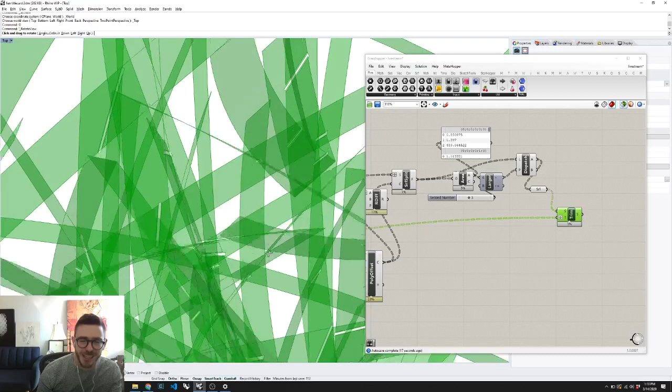If I've done my job right, and this is a great big if, I now zoom in - there we go. Anywhere there's an intersection, I get a cute little reveal. Look how cool that is. This is a tactic you can use to make waffle models and stuff - check all the intersections, flatten everything out, do all of your geometric operations in 2D, and then map it back up to 3D.

I have an extra hard case because I'm dealing with curved surfaces too. But I'm really into those little reveals - I think those look pretty cool.

And now, look how far off we got. So let's just turn all this off. Okay, because I don't like this, this looks fake to me. But if we use this, now it looks cool. I mean aesthetically I don't even know if I like it that much, but I think it's a cool trick.

Can you guys hear the fire alarm? I think my boyfriend's cooking. Oh well, hopefully you can't hear it, and hopefully my apartment is not burning down.

All right, well, there we go. You know, the other thing that's kind of cool, I actually sort of like these close-ups of this whole scenario in 3D.

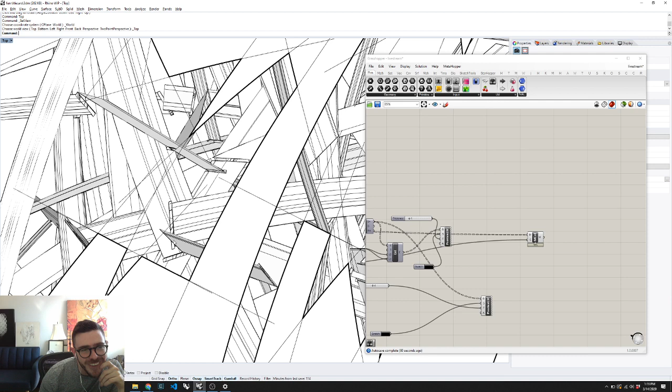I don't know, at some point you just gotta call it. I might just take everything we've got here and do a... yeah, those little slits, man, that was a hell of a lot of work for not a lot of aesthetic value, huh? Oh well, that's alright. It's a cool trick.

Okay, so I'm thinking I might call it here. But I'd like to do a couple things in order to get this ready for production on my plotter.

Oh, you know what else we'll do before that? I'm gonna save this and try to introduce a little bit more randomness. And let's just flex this, because it's always fun to - actually it's better, you know what, the smaller I make it, the better it is. I think it has some of the character of the original. And you know what, it pains me because it took so long, but I'm just gonna totally bypass my little slits - I just don't think they add that much. Oh well, hopefully you learned something from that.

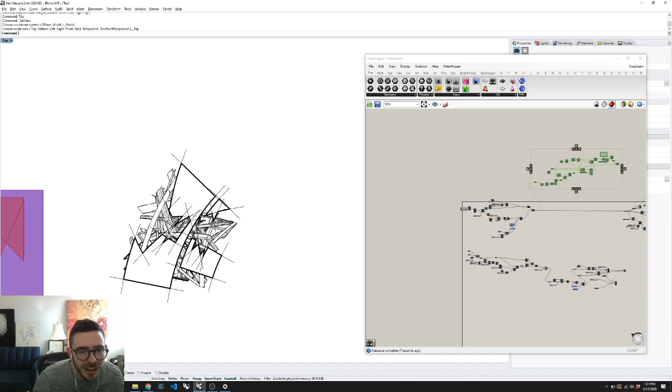Let's take all of our geometry, and yes, okay, I know what we're gonna do. What I like to do before a make 2D is group all of the kinds of stuff into branches, because when I make 2D in Grasshopper, I should in theory be able to match the results back to the source geometry I was dealing with. Pardon me, and that can be quite useful. So let's take one thing at a time.

Let us take these edges - these are the naked edges. These are the sort of lighter line weight edges going in here, and then we've got a mesh. In this case I usually find make 2D works better with surfaces than meshes. It really depends, but it's probably a good thing.

And then I'm gonna take the raw surfaces from here. I don't have a super logical order here, and I've got these, which are my construction lines, and then I've got - did I already get these? No, let's get the thick edges. Cool, okay, now I just have 5 very neat branches.

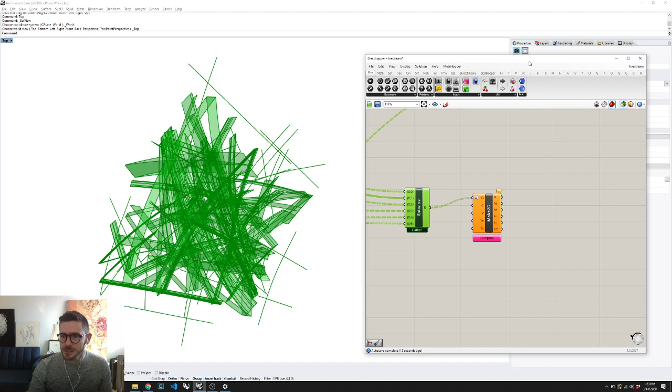I'm going to make 2D, and I'm gonna use the top view. I'm gonna flatten this, which again violates my no-flattening rule, but I will unflatten it after the fact. So we're gonna need to construct a view, and I think for now I'm just gonna use a named view. I can also construct one geometrically, but this is often the easiest way to go. We'll type named view and save as 'top for make 2D'.

Oof, I'm running out of steam, so this will probably be the last thing we do. We'll say view from Rhino view, and the name is 'top for make 2D'. Hopefully it found it - yes it did, that's the view. No clipping planes, no tangent edges, no tangent seams. Let's see what we get.

I'm amazed that 30 people have stuck with me through this, by the way. That's kind of amazing.

So we got a bunch of stuff. Now hopefully the visible lines look a little bit more like our drawing. Oh, did I forget geometry or something? Because it looks like we're not obscuring anything. Oh, I did - I forgot these. So didn't I think I... oh, you know why? Because they're curves, is that why? Yeah, they're curves - I need to cast them back to surfaces before I can pass them along. That is why. Let's do that, and let's rerun our magical make 2D.

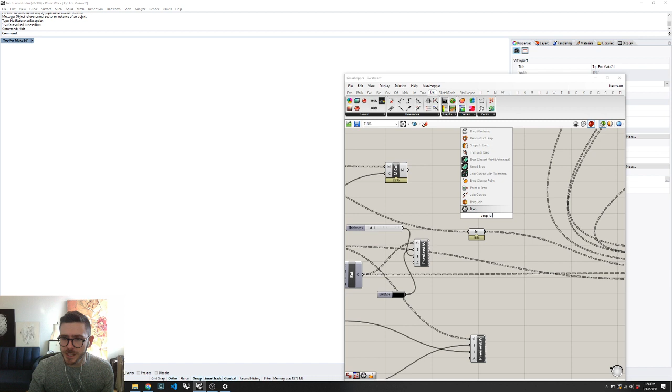And actually, let's do a merge - let's do a brep join and a merge faces so we don't get those internal edges. Yeah, that's more like it. Plug that in. Rerun.

That's more like it, that looks cool. I think what I'd like to do now is figure out which branch this came from before. Here's another trick.

I'm going to use wrap again, this time to make a list of items, and then say random color. This is a wombat component I think I already showed, and I'll graph that so I have one color per branch, then I can color code my results with a custom preview, all my geometry color coded by branch. We'll zoom in. The other trick is if you cluster a custom preview component and turn on preview contents, even in this mode where you only draw preview geometry for selected objects, it'll still show with appropriate colors. I love that trick.

Okay, so I know I want certain branches to be a little bit thicker than others. This is actually going to be a post-process on the 2D geometry, because now we're all projected back, we're flat. So this is going to tell me the index of the source object.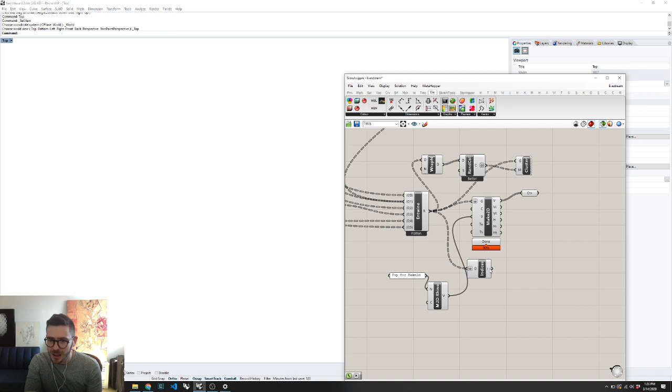And so I flattened here. If I use the indices component, list indices from Wombat, which is really just like a list length plus a series, and then I want to figure out which branch each one belongs to. So how am I going to do that? I have 1238, 1238, 547, right, which makes sense.

One thing I could do - there are probably some objects that don't show up at all. So how am I going to figure out which index belongs to which group?

I think what I'll do is unflatten my indices. So now at least I have these indices per branch. And then I should be able to, for each of these, say member index. Let's try that. So basically these are going to be the indices of the source object. This is a list of 547 things, and this is sort of a parallel list of indices.

I'm going to find out whether this index for each of these 1238 objects exists in any of these branches. So the set to operate on and the member to search for - this is going to be the set. I actually have 6 sets and 1 list of members. I suspect in most cases the index is going to be -1. Oh actually, it doesn't even do that - it just gives me back no index.

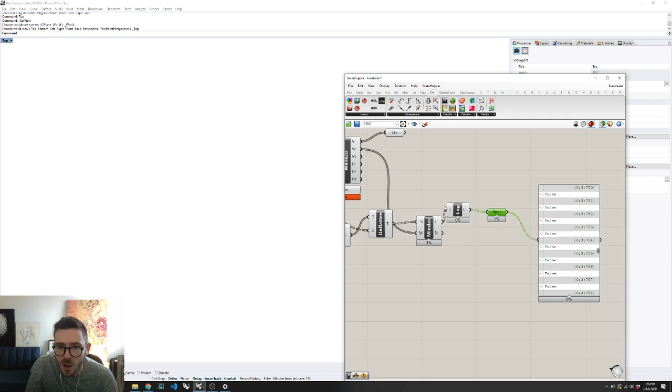So what all that messy data tree stuff allows me to do is dispatch my flat list of make2D curves back into branches that correspond to their source geometry. Woof, that's a big mess, but the beauty of it is now I can just double check that I got it right. And lo and behold, that make2D sure looks like it got the source objects correct relative to where we came from.

Let me go over that again, because matching your source objects to a particular branch after a make2D is definitely a useful trick, and this general pattern comes in handy a lot.

So I've got some flat list of stuff - in this case 1238 - and that flat list was generated from another flat list, which has 547 items, which came from a non-flat list, which had 6 branches.

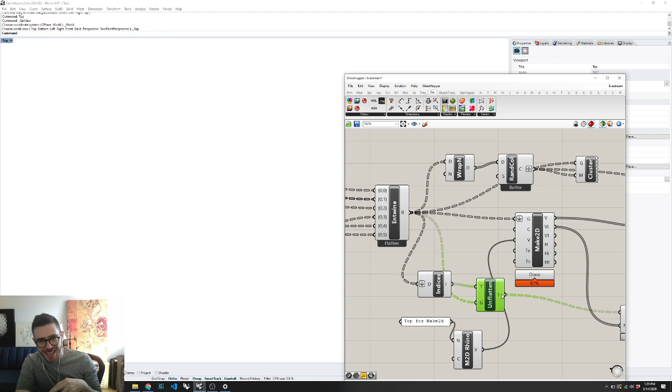I'm going to get the flat list of indices from 0 to 546. I'm going to unflatten those to coerce those indices back into the branch structure they came from. So this is going to be pretty straightforward - it'll be 0 to whatever.

You know what I could have done too? I could have probably created a domain from each of these and done a domain includes. That would have been - let's do that too, just for shits and giggles. I just thought of a better way to do this.

If we take the bounds of this list, we'll get an index domain for each branch, and then we can do domain includes, where I've got my 6 domains for my 6 branches. I've got my indices, and this should be equivalent to what I got here, which is it'll be true if it's included and false if it's not.

So in theory, let's actually just visualize this. Zoom. If I make this my dispatch list, that's way better. And this will be faster too, because now I don't have to search for every item in every index. Instead, I've just created a range, because I know that these are gonna flatten out to a nice list of indices.

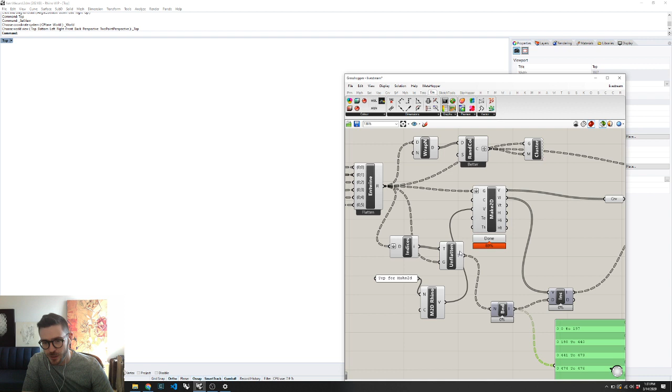And I know that it's going to go 0, 1, 2, 3, blah, blah, blah, up until the end of that branch, 197. And then it's going to start over for the next branch, but it's just going to go sequentially. So I can safely say that if I just find the bounds of each one of those branches, indices 0 to 197 belong to branch 0. Indices 198 to 440 belong to branch 1, et cetera.

And so by doing that, I can now take this list of indices that came back out, which are a map from my 1238 produced objects and the 547 objects from which they came, in order to split this back out into a group according to the branch that it came from. So, that's a heck of a lot of work. What are we going to do with it?

What we're going to do is we are going to bang, which is explode tree, so that we get these back out. And I'm going to take the curves that I want to be thicker, because I'm lazy when I produce my drawings. I don't like to switch pens. Instead, I like to double up lines that I want to be thicker. So I want to take this whole set of curves, and I want these to be just a little thicker than the rest to have a little bit of line weight variation.

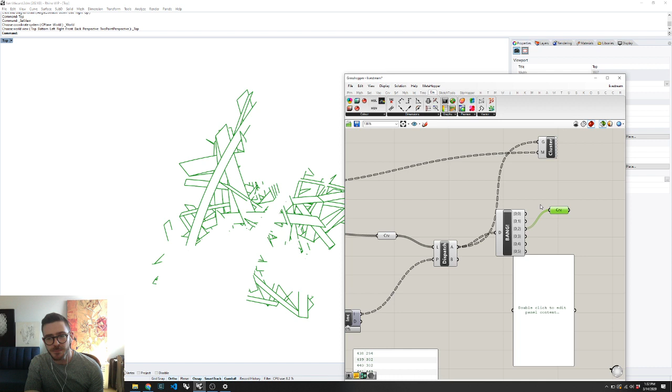And I might end up doing that with some of these others. These definitely want to be thin. These might want to be thick. These might want to be a little bit thick. And then I think the ones I just had want to be the thickest, and then everything else can be thin. So let's organize this. These are going to be thin, thin, thin, and thin. These are going to be medium. And these are going to be thick.

So the way that I do this with a single pen, which happens to be 0.25 millimeters, is I just offset and double up the line and have it draw twice so that we wind up with a kind of double line. So these are fine. These I'm going to offset by some amount. And I don't really know what unit system I'm in now. So this would maybe be a good time to actually locate this on a page and know physically how big it's going to be so that I can make decisions about its line weight.

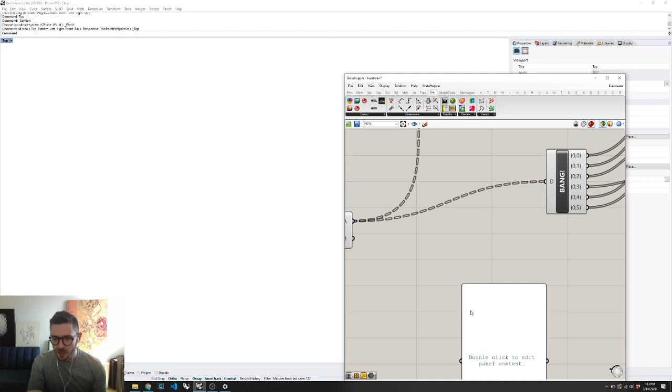So I have some MetaHopper snippets that I use to finalize every drawing that I do. So I'm going to do fit on page. This one's actually just a cluster. And all it does is it takes the bounding box of all my geometry and fits it neatly onto some predetermined rectangle, which happens to be the size of the paper that I use. So I'm going to take all my geometry and say fit on page. And now it's on the page.

And just to get this to fit a little bigger on the page, I might just rotate it, similar to the way I had rotated my view before. So yeah, actually that's pretty good as is. I kind of like that. Let's go with that. Let's let it be a little dynamic. And so now my geometry is guaranteed to fit on the page and within the range that my AxiDraw can draw. And this preserves data trees. Any cluster should preserve data trees, and that's a good reason never to flatten, especially inside a cluster.

But that means I can guarantee that I'm still going to get my thin lines, my medium lines, my thick lines. The other cluster or snippet that I use for this process is Rapidograph pen preview. So I have a set of Rapidograph pens that have certain thicknesses. In the end, I almost always use the 0.25 one, but this will allow me to preview using custom preview line weights with their actual thickness.

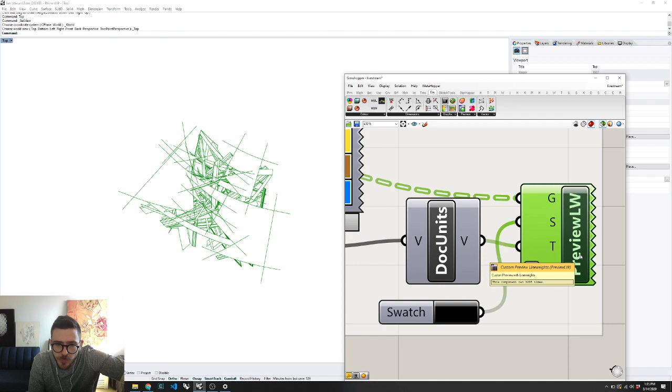And when you turn on absolute in preview line weights, it will actually scale the lines so that they take up the real dimensional space that they would. So this is really good for doing things like print preview. So I can see that I get, and actually now I'm going to have to turn off preview for everything. Nice thin lines. Now, let's make sure we do that for the fins.

And then if I wanted to swap a pen, I could say, let's do this with a medium, and let's do these with a thick. But I'm actually not going to do this because I'm too lazy, although that looks pretty cool, but I'm too lazy to swap out pens. So instead, I'm just going to double up my lines, like I said before. So we're going to post-process these at paper scale.

So what I will do is offset each of these curves by some amount. And let's make it 0.01, and maybe, well, let's start with the actual, well, what units am I in first of all? So this is gonna be really small. So 0.005, I don't know. I just guess and then I make it smaller or bigger as necessary. So let's look at these together.

Yeah, there we go. See how I can just give this the appearance of a fatter line by doubling it up? And we can validate that too by plugging all of this in with the same custom preview. I can now see, yeah, I could go really extreme and then you actually start to see the gap, but I'm just gonna make it kind of like that.

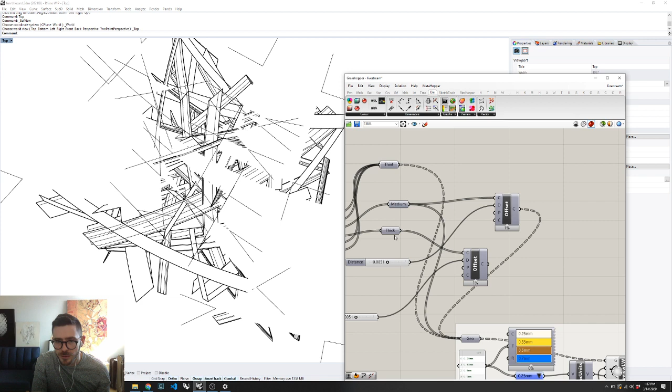And then I'm gonna do the same thing with my thick lines. And I'm going to plug those in as well as the offset versions thereof. And these I'm going to permit to be a little fatter still. I kind of like that. I think that looks cool. Woof, okay. I think we're there. I think this whole set of geometry is basically ready for prime time.

And so what I'm going to do is, there are two ways to do this. A lot of my work only generates polylines, in which case I can use a custom SVG exporter that I've written that actually has in it the Inkscape template and stuff, so things come out grouped nicely. I can assign them layers and other stuff if I want to do multi-pass drawings or whatever. But for this, I think all I'm going to do is bake it.

Make sure I have preview turned off. I'm gonna, whoops, I didn't mean to do that. I'm gonna select this geometry, export it, and we're gonna make it an SVG and say live stream drawing. And let's do, now all my scale stuff is thrown off, but I kind of roughly know how to scale it, so it'll be fine. And there we go.

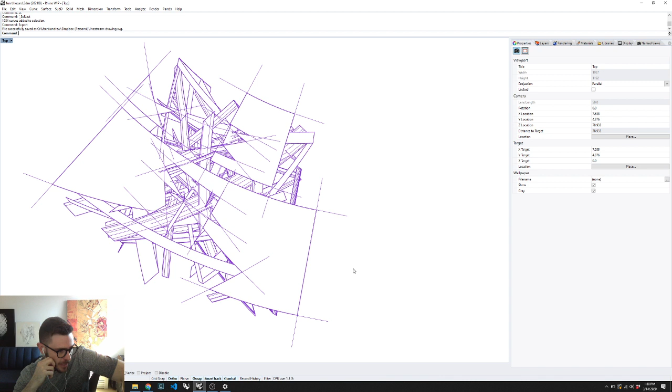The next thing I need to do is actually prep it for AxiDraw. I'm probably not going to do that on the live stream. I really wanted to focus on the Grasshopper stuff.

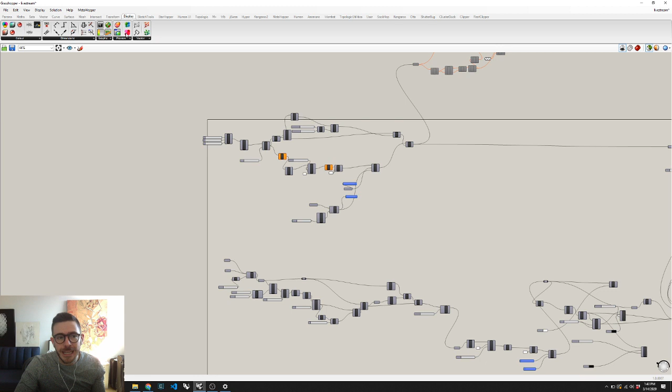Yes. Okay, good. I'm glad someone asked that. So one of my favorite MetaHopper tricks is the snippet. So sometimes it makes sense to cluster something, but sometimes you really want to be able to expose all of its controls, and I wouldn't want to have to type this in or whatever. I want to just be able to pick it from among a list. So what MetaHopper lets you do is take some set of components. So let's find a good example of this.

Let's see. I'll just do a dummy example for now because I'm out of ideas. But if I take some set of components like this one, this is a good one. This one generates random points and random lines. So I'm gonna put these up here. I can say MetaHopper save snippet, and it'll take the stuff that's selected here and make it into a special cluster. So I'll say this is random polyline. Okay, and now if I instantiate random polyline, it'll just give me back those components.

And the way that this works, I'll let you in on a secret since you've stuck around all the way to the end. If you lock the solver and instantiate that same thing, random polyline, I would probably do this totally differently now if I had to. It actually creates a C# script that encodes within it a binary representation of all of the components that you set. So this is really long. And then this script is responsible for instantiating all of those objects and deleting itself.

So that's why if you do it when the solver is locked, it doesn't do anything. And then as soon as you permit it to compute, it creates the stuff and deletes itself. There's probably a better way to do that. I know a lot more about programmatically instantiating components now than I did before. That's just a fun trick and one that I use a lot.

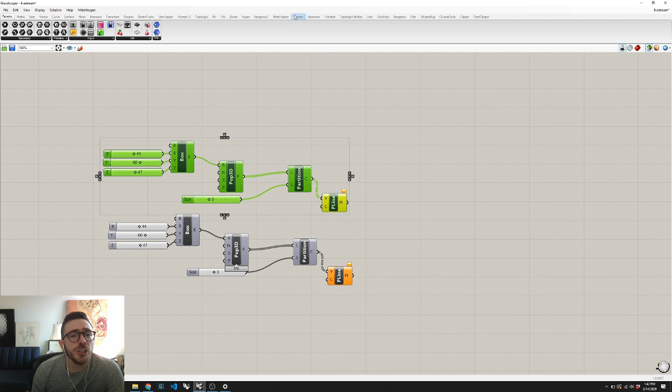There was a question about whether my custom components are available for public use. A lot of the custom stuff that I showed belongs in plugins that are public. I showed a lot of Human and MetaHopper stuff. Those are all public, of course. My fit to page and stuff, I would be happy to share. They're just user objects. So if you're interested, let me know. I can share it. I haven't published them.

I have a library called Sketch Tools that I deliberately avoided showing today because I knew the question would come up, which is my personal plugin for my own use, and that I won't share because it involves some of my custom algorithms for doing stuff that I consider my style, so I wouldn't necessarily want to make it available to everyone. So there's always a trade-off, but if there are specific user objects or clusters that I showed today that you would be interested in getting a hold of, just let me know and I'm probably happy to share it.

Yeah. I would definitely love to do a live stream of the floor plan stuff. I should do that. That would be really fun. The basic principle. I wonder if I even have it on here. Yeah, I think I do. This might crash everything, so I probably shouldn't even open it, but I'm going to anyway. Oh yeah, it's mad. Why is it mad? Some serialization error. I don't know.

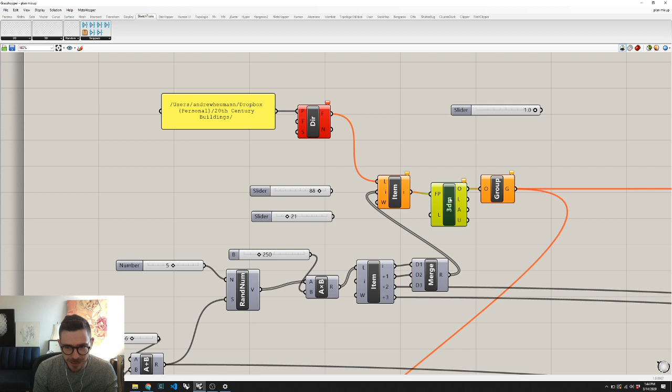In any case, the basic idea is that I took a bunch of CAD files that come with the book of great 20th century buildings, and programmatically read all of the CAD and loaded it into Rhino, and then layered them on top of each other and did a bunch of geometric processing to sort of blend them together. So I won't reproduce those exactly, but I would love to do a live stream maybe next time on working with source geometry, like for example my example CAD drawings or something. We'll close out of this guy.